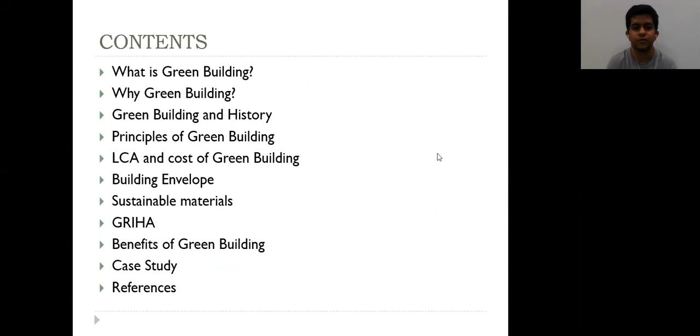Green building does not have a worldwide accepted definition, but the World Green Building Council defines it as a building that in its design, construction, or operation reduces or eliminates negative impacts and can create positive impacts on our climate and natural environment. The USGBC has defined it as a holistic concept that starts with the understanding that the built environment can have profound effects, both positive and negative, on the natural environment as well as the people who inhabit

buildings every day. And the Indian Green Building Council defines it as one which uses less water, optimizes energy efficiency, conserves natural resources, generates less waste, and provides healthier spaces for occupants as compared to a conventional building. Next.

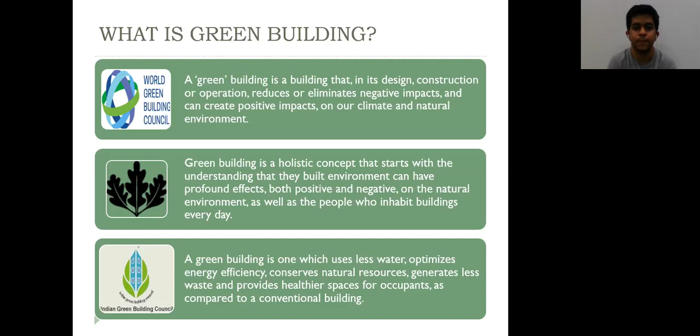Why are green buildings necessary? Because conventional buildings utilize large amounts of resources, which indirectly affects global concerns such as climate change, ozone layer depletion, and greenhouse gas emissions. Next.

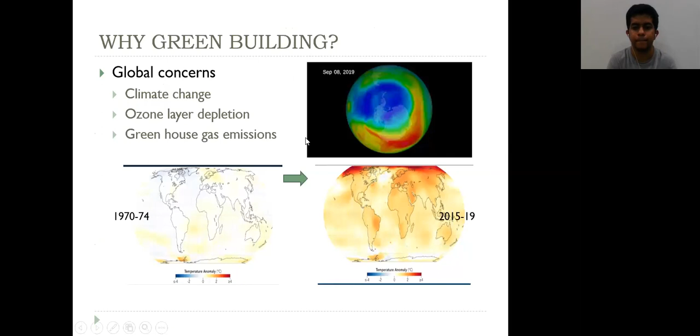Conventional buildings versus green buildings. Conventional buildings are responsible for large use of resources like energy, water, raw materials, and land, and they are also responsible for large greenhouse emissions and other harmful air pollutants. They also generate large amounts of construction and demolition waste, and seriously impact the life of plants and wildlife animals. Now, Dinesh will continue.

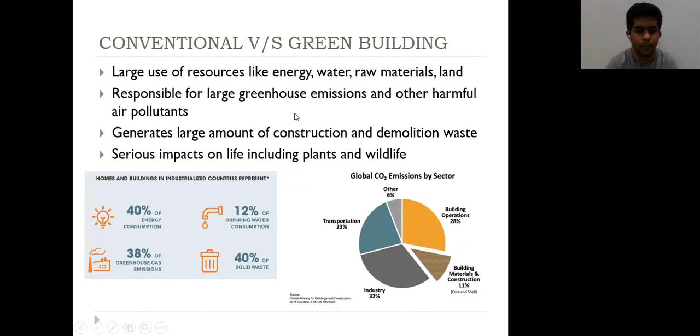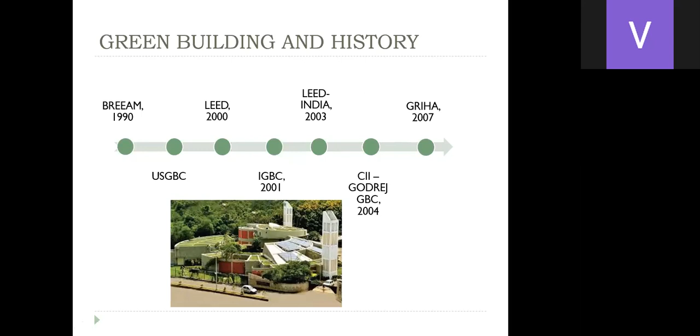My name is Dinesh, and I am going to continue from here. Green building and history. Firstly, the green building concept was introduced in the year 1990 under the concept of BREEAM. After that, the United States adopted this method. In India, the green building movement was started in the year 2001. After that, LEED India was launched in 2003. The first green building in India was constructed in Hyderabad in 2004, and further in 2007, GRIHA was adopted as the national rating. Next.

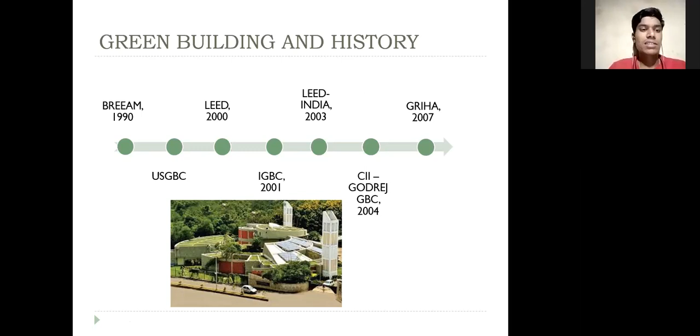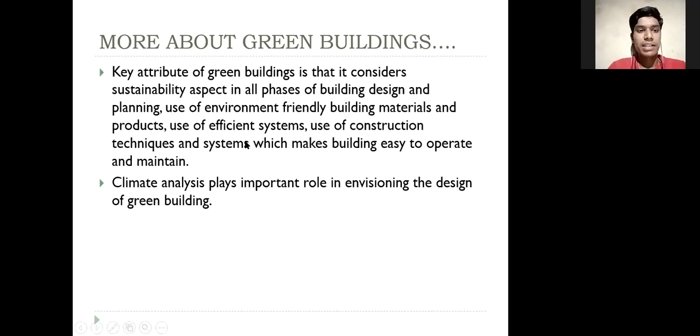More about green buildings. Green building considers sustainability aspects in all phases of building design and planning, use of environment-friendly building materials and products, use of efficient systems, and use of construction techniques and systems which make the building easy to operate and maintain. Climate analysis plays an important role in envisioning the design of green buildings. Next.

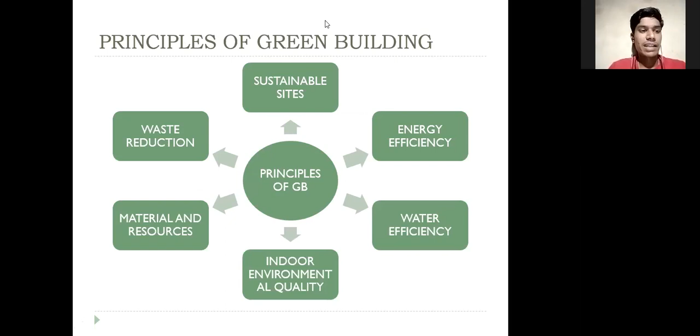Principles of green building. There are 6 principles of green building. First, sustainable sites. Second, energy efficiency. Third, water efficiency. Fourth, environmental quality. Fifth, material and resources. And last, waste reduction. Next.

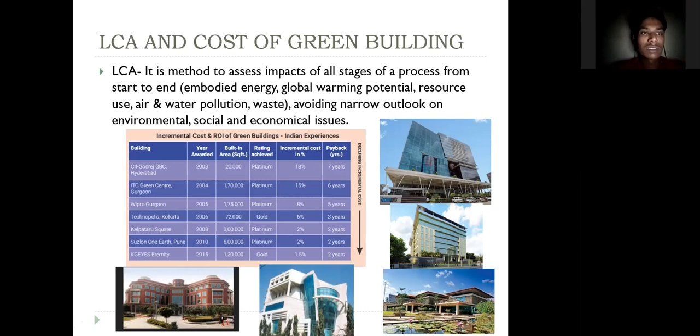LCA and cost of green building. LCA is life cycle assessment. It is a method to assess impacts of all stages of a process from start to end. It contains all the methods we study: sustainability, compatibility, and durability of the building. Here is a chart giving data about the green buildings constructed in India, with their surface area and the rating achieved. Next.

Building envelope. It plays a major role to optimize energy efficiency and indoor environmental conditions. Good insulation can reduce energy consumption by up to 10%. R value and U value. R value indicates the resistance to heat, and U value indicates the thermal transmittance, per unit time per unit area. Further, Pradumn will continue.

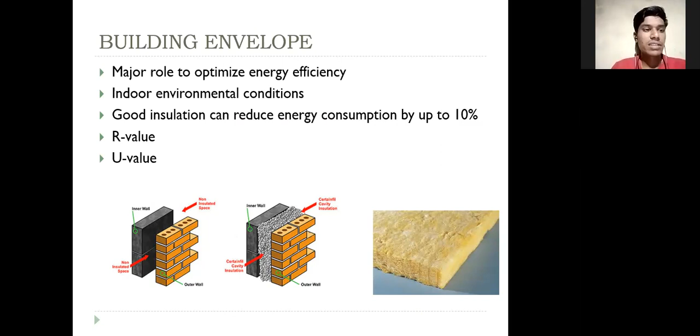Good evening, friends. I'm Pradumn Suryakar. Now we will look into sustainable materials, GreenPro eco-labeled products. A number of products are listed here, like construction blocks, cement, tiles, insulation, construction chemicals, high performance glass, RMC, architectural products, etc. Like utilization of industrial waste like fly ash and slag, low VOC products, volatile organic compounds, reduction in hazardous and non-hazardous waste disposal to landfills, higher visible light transmittance, and use of sustainable raw materials.

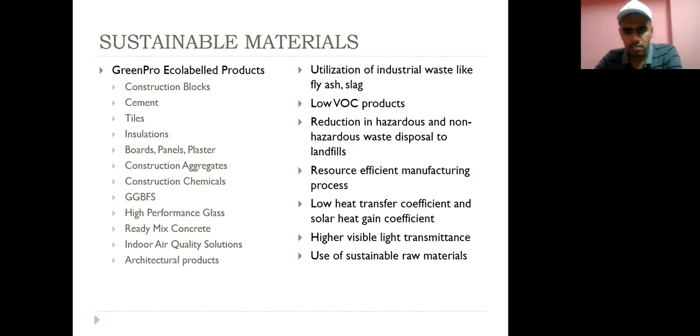What does GRIHA stand for? Actually, it is Green Rating for Integrated Habitat Assessment. The features of GRIHA are: performance-based rating system, common sense-oriented rating system, emphasis on integrated design approach, and it rates AC, non-AC, as well as hybrid buildings.

What does GRIHA assure? GRIHA assures us 30 to 50% reduction in energy consumption, as well as renewable energy integration to offset grid demand, 40 to 65% reduction in water consumption, waste management during construction and demolition, and 30 to 40% decrease in operational cost.

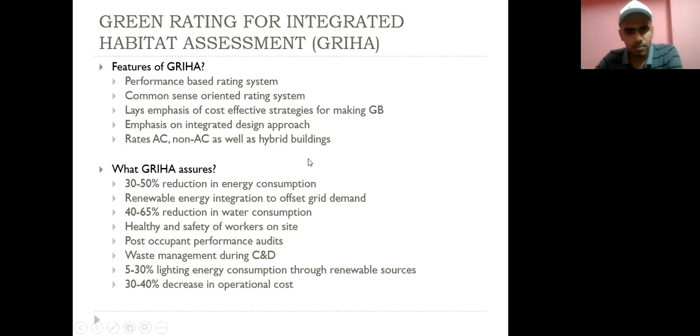Something more about GRIHA. All buildings in the design stage that have a built-up area of more than 2,500 square meters are eligible for certification. A number of buildings are listed here, like offices, retail spaces, institutional buildings, hotels, hospital buildings, residences, and multi-family high-rise buildings.

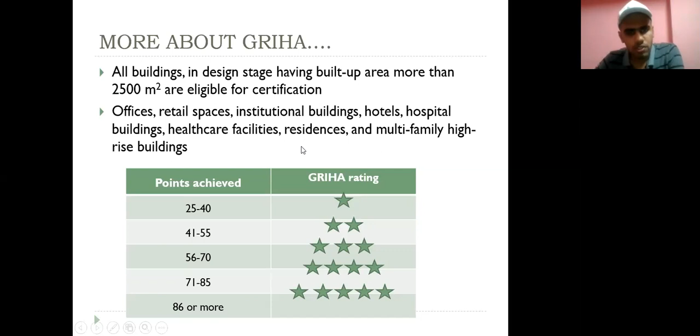Some ratings are given, like one-star rating for 40 points, 3-star rating for 56 to 70, and 5-star rating means 86 and above. GRIHA rating assessment depends on a number of factors. The most important factor, which has the highest weightage, is energy. In energy, we will look into some details like energy efficiency, renewable energy management, and low ODP materials. The weightage given is 20%. ODP stands for ozone depletion potential.

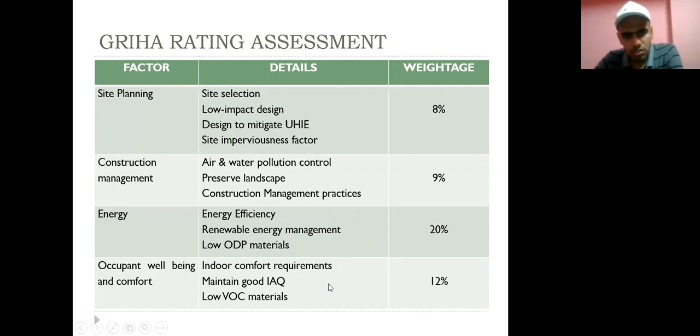Construction management also has some weightage. Then water, sustainable building materials, solid waste management, socio-economic strategies, performance monitoring, and validation. The second highest weightage goes to water, which has details like low flow fixtures, reduced landscape water demand, water quality, on-site water use, and rainwater recharge. It has a weightage of 17%.

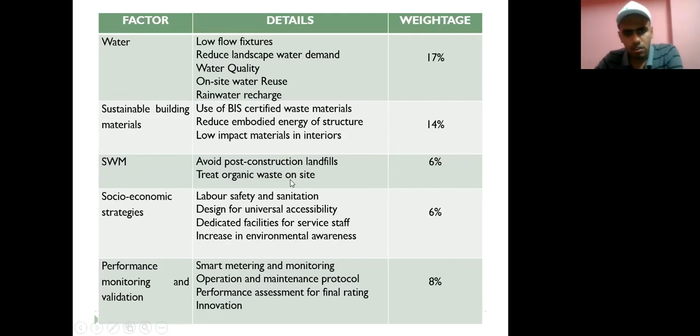From now, Hrushikesh will continue. My name is Hrushikesh, and I'm going to talk about the benefits of green buildings. Green buildings are one of the most efficient means to achieve a range of global goals, such as addressing climate change, creating sustainable communities, and driving economic growth.

Environmental benefits. Green buildings not only reduce or eliminate negative impacts on the environment by using less water, energy, or resources, but also have a positive impact on the environment by generating their own energy or increasing biodiversity. According to the United Nations Environment Program, the building sector has the largest potential for significantly reducing greenhouse gas emissions, of about 84 gigatons of CO2 by 2050.

Economic benefits include cost savings on utility bills, lower construction costs, higher property value of up to 7%, increased occupancy rates, low operating cost, and job creation, as stated in the United States and Canada. Social benefits. These include health and well-being of people who work in green offices or live in green homes, such as a happier and more productive life. Various studies suggest that better indoor air quality can lead to improvements in performance of up to 8 to 10%. Next slide.

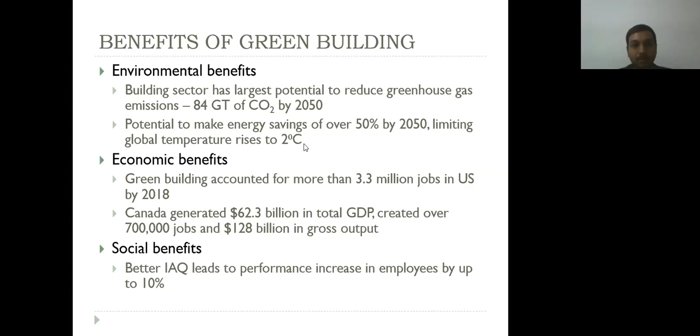This is a case study on SUZLON One, located in Pune, Maharashtra. Here are some of the features like site area, built-up area, energy consumption reduction, water consumption reduction, occupancy hours, renewable energy installed on site, and GRIHA rating. SUZLON One is a LEED Platinum and GRIHA 5-star rated building. It is one of the greenest, eco-friendly, and self-sufficient corporate campuses in the world. It is spread across more than 10 acres.

It is completely powered by renewable energy, including hybrid wind turbines, solar panels, and photovoltaic cells. Through sustainable practices like rainwater harvesting, on-site waste conversion, and an office and garden design to maximize daylight use, it reduces the operating cost by 35%. Some other features include sustainable site planning measures and passive architectural strategies. Next slide.

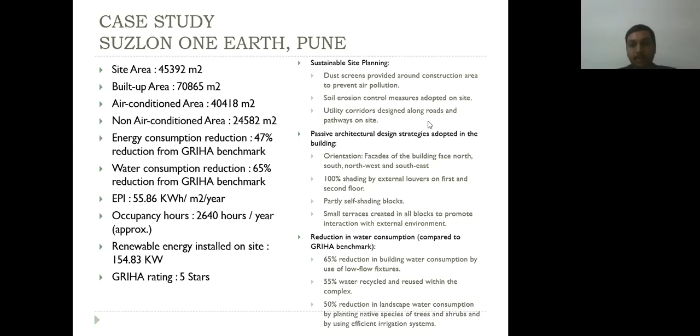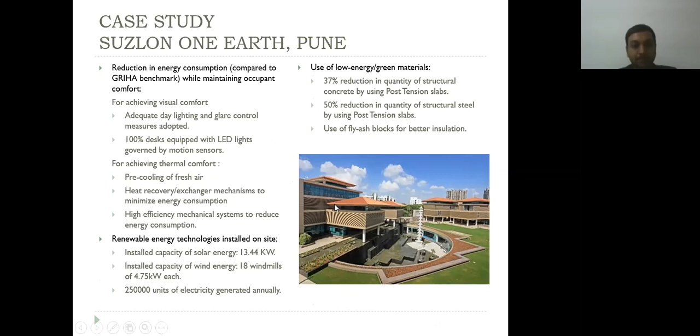55% of the water is recycled, efficient irrigation systems, motion-sensored lights, better insulation by use of fly ash bricks, and reduction in quantity of steel and concrete by using the post-tensioning technique. Next slide. Here are some of the images of SUZLON One Earth. Next. Here I end the seminar.